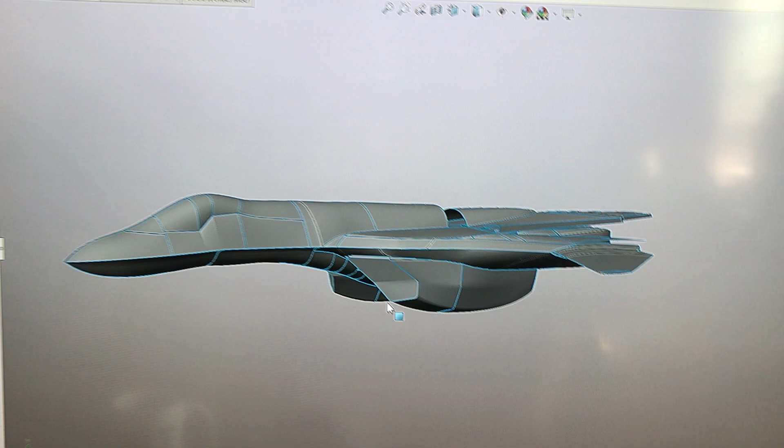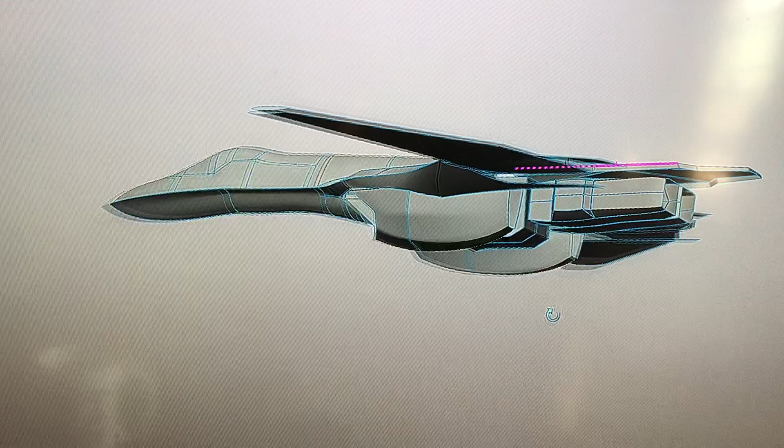Anyway, the last video, which apparently sucked, I just gotten the legs done. I was talking about what I was going to do next, which was moving on the arms, and I've done that. So yeah, quick overview. Oh, and the wings.

Right, so came in. Let me back up some stuff here on our tree. Let's see, let's just go back here, see what I got going on. All right, so I worked on the arm.

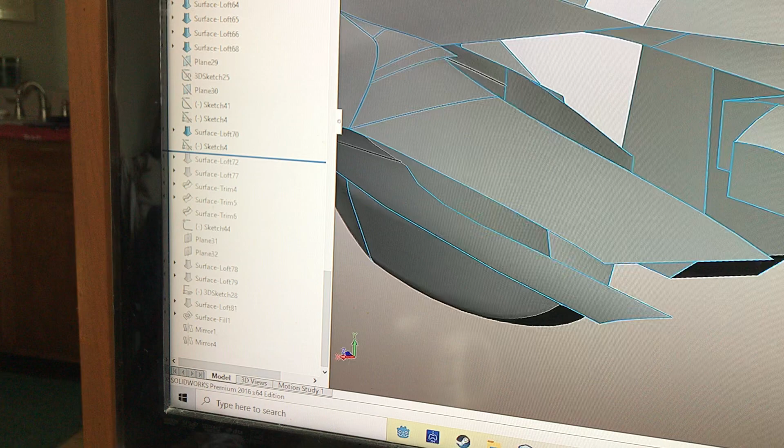Get our sketching view. And what I did was brought in another sketch. I went back in time, rolled back so that all my sketches are at the beginning here, and I have access throughout the project.

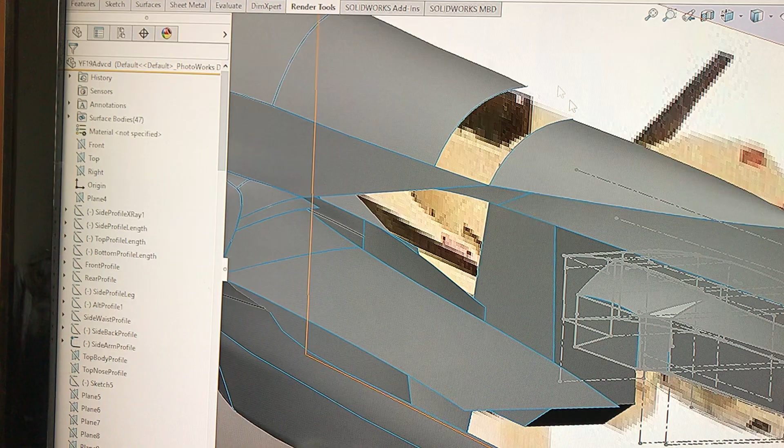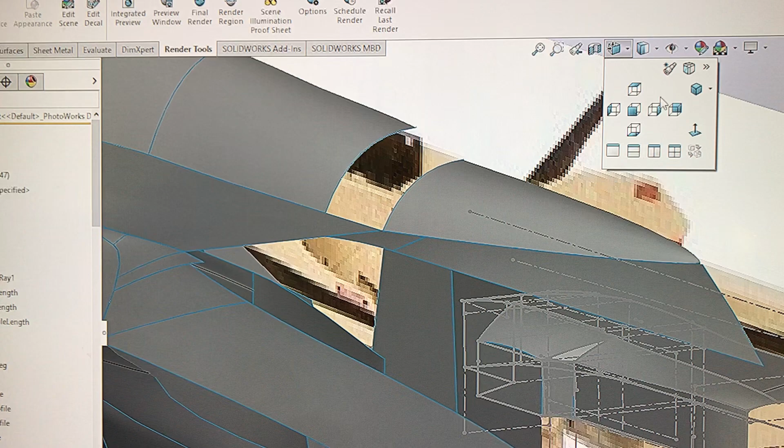I found a not a cutaway - this was a transformation video? Or no, this is from the same user guide that gave me the side image, also had these other images, and they are like the user manual. I don't know how to describe the type of video or imagery, and so there was some instruction - this is part of an arrow showing, oh, you pull the arm down or whatever.

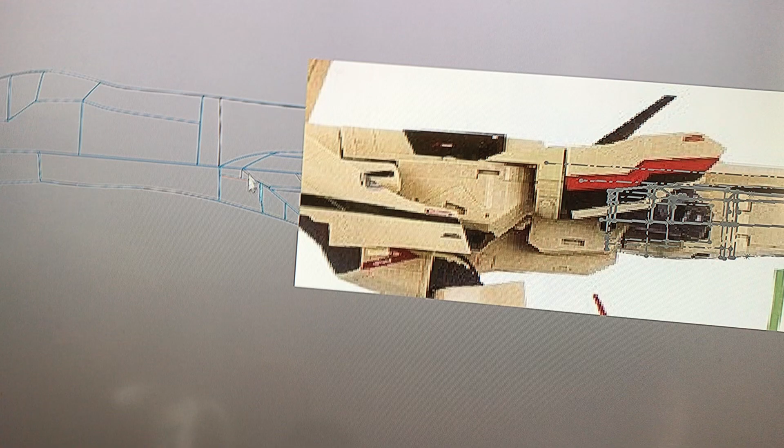So I cut this up, obviously, scaled it again to try and fit my image. As you can see, it doesn't line up, but like I was saying, with the angles and the fisheye, things don't really line up.

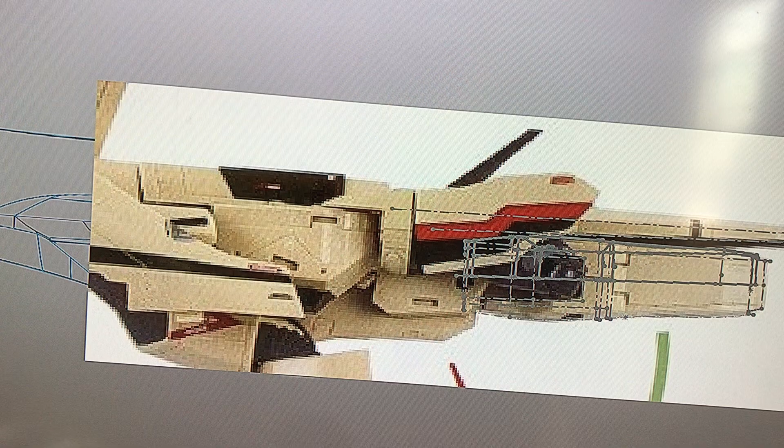So I focused in on trying to get this, just this piece, to line up. Really this, and then the shield. And then I had to make some adjustments on my sketch due to this, so that I'm conforming to what this shield is doing. All right, so with that in mind,

that required me to have to raise this up. This was going at a steeper angle. So this is all up now, and this has more of a bubble on it, but it's more correct.

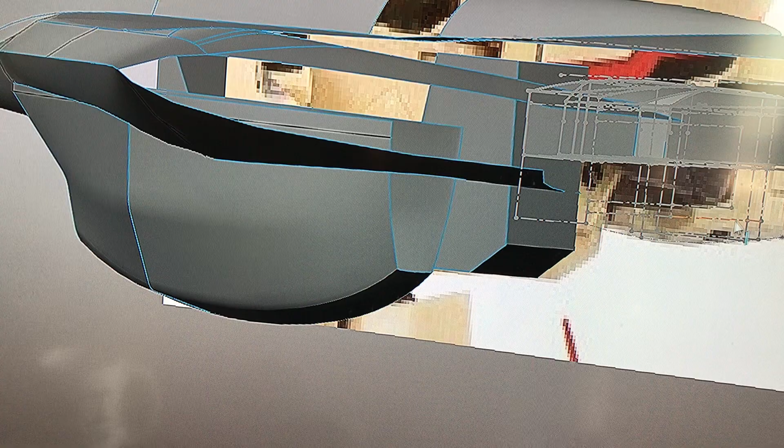And then I'll just go ahead and start rolling back. And then, you know, obviously there's the sketches, but I did my side construction, and then I did a bottom construction. Where's my bottom profile? All right, on the bottom,

and I'm still doing this as I go, right? As I pick something, I'll come back in and add sketches. But on the bottom, I went ahead and added construction lines to go with the arms of the image. Notice it doesn't match it exactly because I'm making it conform to the side image I had.

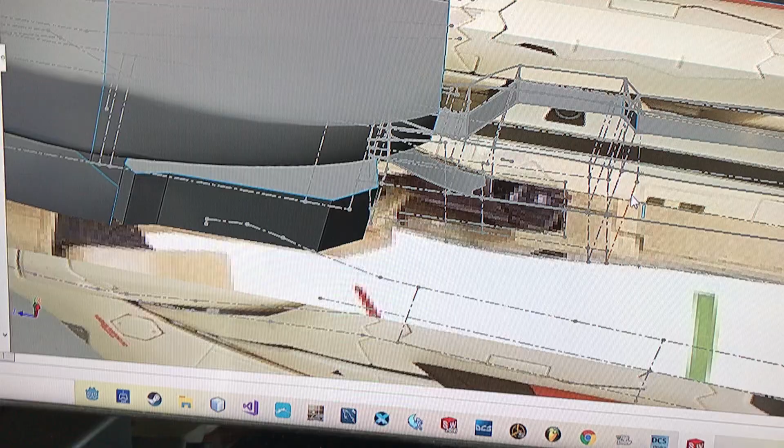So I basically made it and it scooched it back, so it's just really offset but the same size, right? And so there was a bottom, there's a top. I draw some construction lines, extend some lines on the X and Y to basically make a scaffolding - basically make each one of these points a place where I'm going to connect the line. So that's what's going on there.

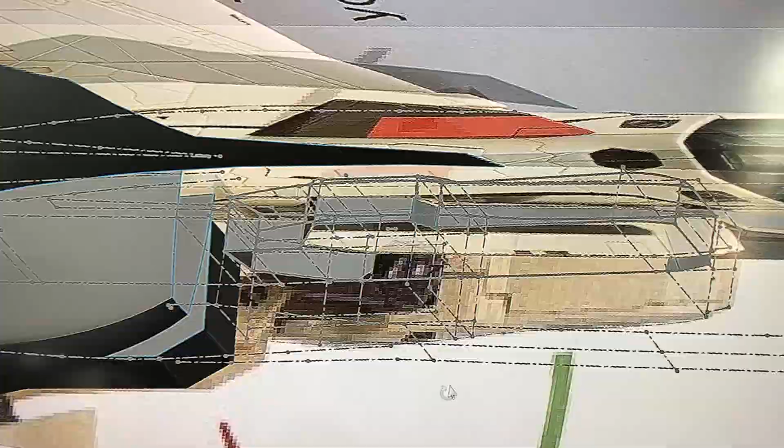And yeah, so we just go through the exercise of lofting and such to get that imagery to come out. Hide this stuff so you can see again.

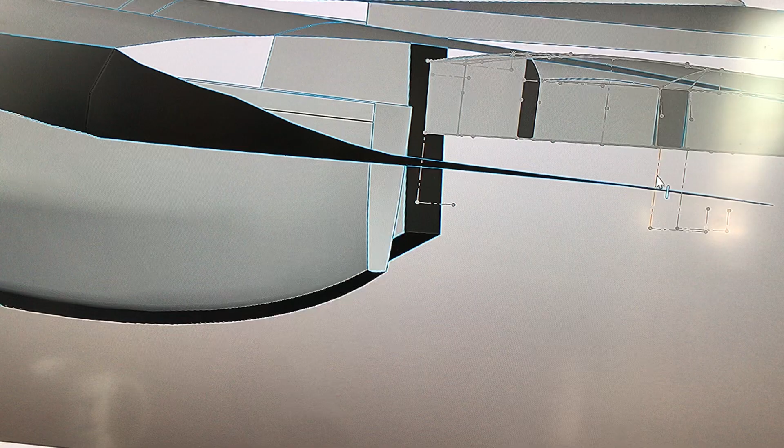Alright, and so I went one side. This angle here is not parallel with anything, or the top - it's got a slight angle to go with the shield, because there's some stuff that I have to build under this shield that allows for a section here to slide under this and become a part of that. So there's that little bit of gap that has to be there. This nice cavity, that should work out.

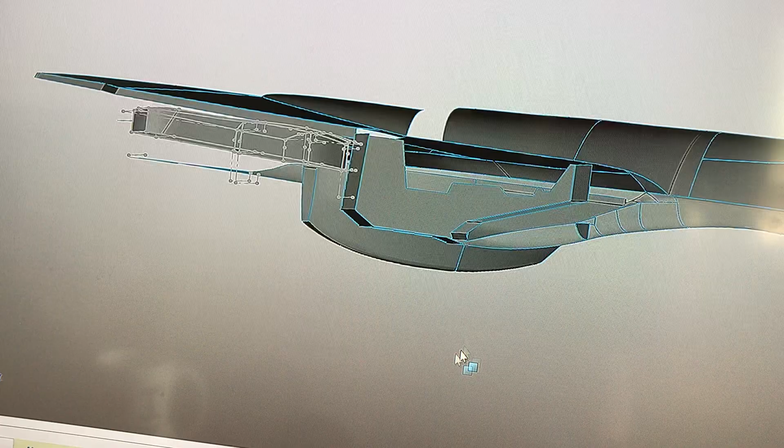Oh, you can see my side cutaway of some stuff. Anyway, so after I got that, basically mirrored the arm. Boom. Because it's just two pieces of one half. And I just mirrored it again, to see what things are looking like.

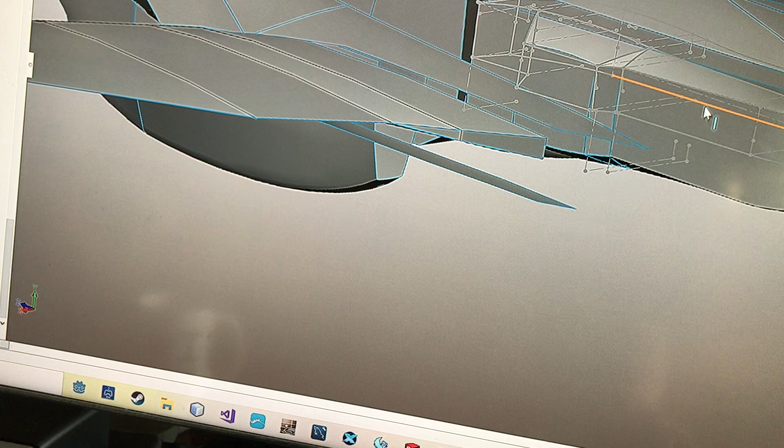Right, and bam, there you have it. Let me add the sketch. And then after that, I realized I have nothing left but the arms and legs to do. And that's where I ran into challenges last time.

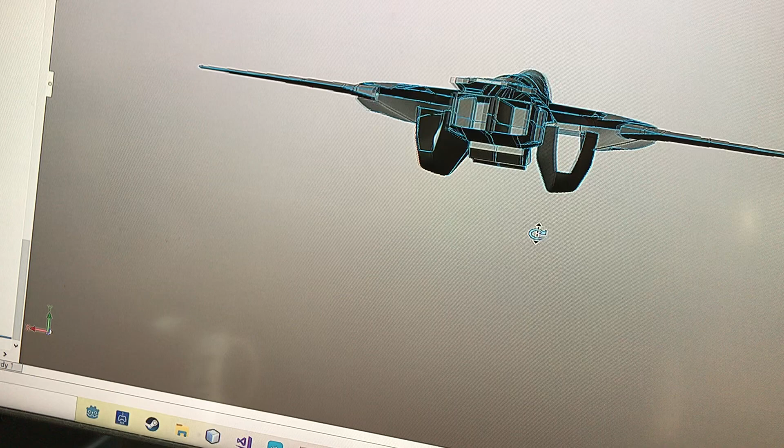You know, the rear part of the leg, the calf leg, I guess. So anyway, when I run into stuff like that, I go ahead and focus on something I can do, so I feel some progress. So I went ahead and worked on the wings, right? Because why not? Simple enough.

Get it in there, starts to look like something - the wings, and then trimming up these edges so that they look like they're supposed to look. And next I have the arm pieces.

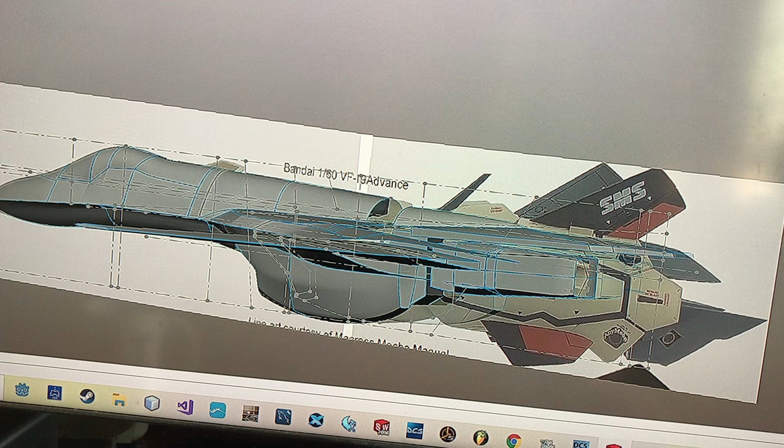I've started sketching them out. So if I go to my side profile, it's basically this, but I brought in another arm. What did I call it? Alt profile is what I'm calling it.

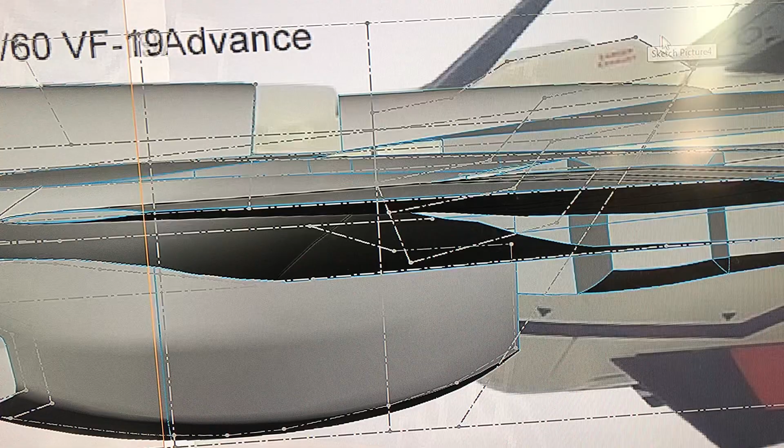Where I've got the sketch of what the arm thing should be - I don't know what to call it, the shoulder, but it recesses down into the body. And then somewhere here's a leg. Where's my side leg profile? And the two together - let me hide the profile lines.

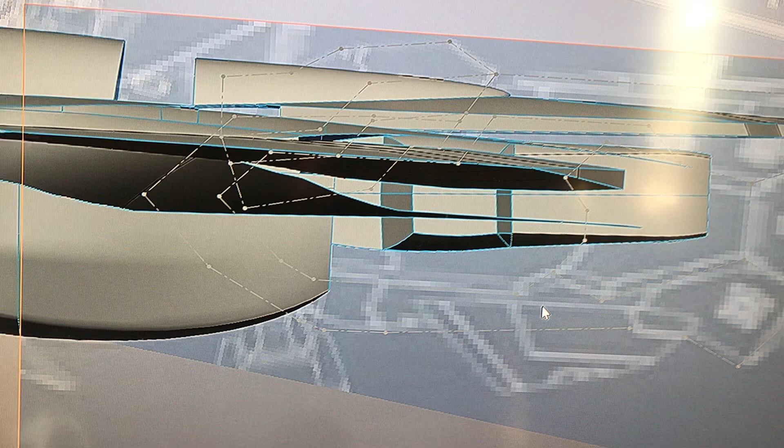So maybe you can kind of see this. We got two images overlapping, a side with some construction stuff that's just giving me the general points, and then the arm one. I have to figure that out.

So I got a side view, and I've got the bottom profile - this is where it sucks. I gotta figure out this crap, but it's so organic, right? Where do I start? So I'm sketching this out, trying to figure out what's the middle line. I noticed there's an angle to this versus being parallel with the center, and this angle needs to translate to the top where the arms are going to be.

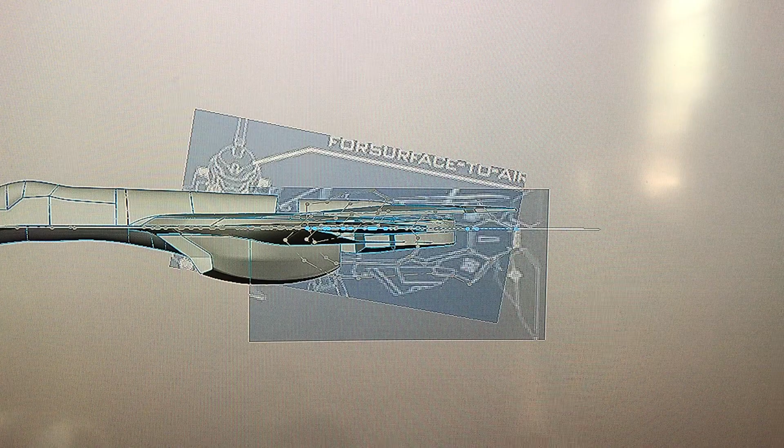Also, top profile lines show - on the top, like this one, doing the same thing for the arm section, right? It's hell. Let me go to the top.

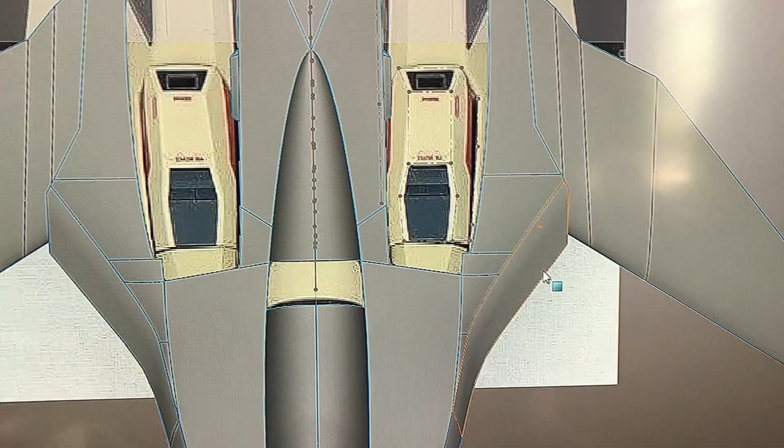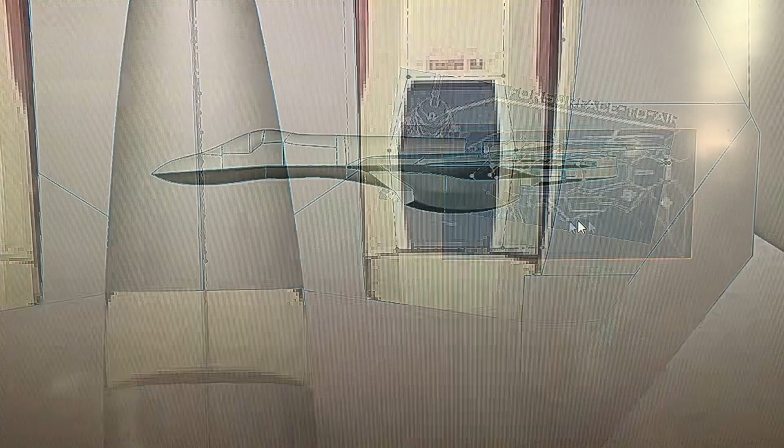It didn't look right. It still doesn't look right - oh, because I still have the bottom on. Anyway, same thing with the top of the wing, getting it, or shoulder or whatever, in place. Not sure how I'm going to do the sides because that recesses down, so I don't really have a side edge. Same thing here, it goes down to the body, so I don't really know what that's looking like. All I really have is this red to go by, and that lines up with these stripes here.

Right, so I've got that. Here's the side - I've already got it kind of aligned with what this should do. I'll just extend some construction points out from this and up from this, and where they meet I will draw lines. We'll see how that looks.

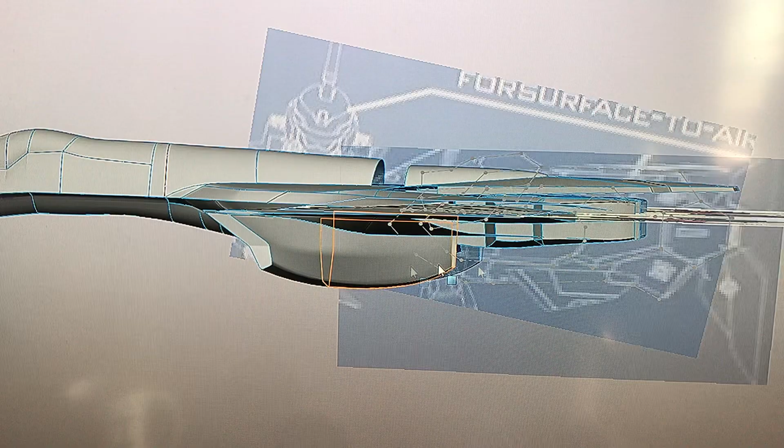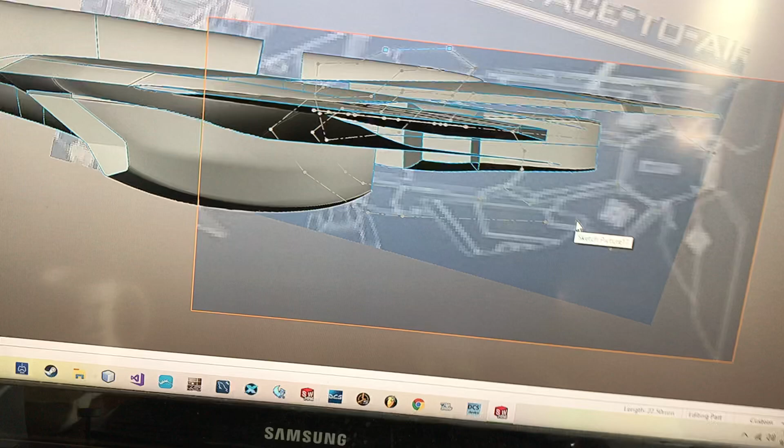I'm definitely going to start with this before I try the leg, although that's probably a bad idea too. I can never get this square. I usually start off with this guy because it ends up being harder than it seems, because it's a weird shape. But at the end, this leg piece with that contour and making it fit right...

It's just been - oh, and printable, because I've been able to make it many times, but good luck shelling it and not having some issues. Good luck doing all kinds of things. Split it just right so you can 3D print it, because things want to fall apart when the geometry gets wonky once you start cutting it up a certain way. Anyway, that's where we are.

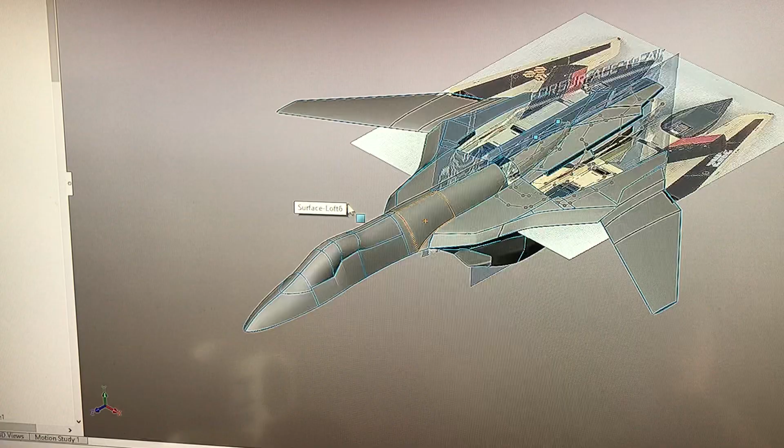I'll do a quick render, because that's always kind of cool, sorta - not really. I got, what do I have on? I think it's called Street Lights or something. Final render, to make it look cool. It highlights the model, kind of colors it green with red and green highlights here and there.

It's neat. Hey, look, you can see me in the TV. And you can see I'm doing this with my damn cell phone, and hopefully I'm loud enough.

But anyway, I don't know, I thought this would be interesting. I could never find videos of people doing this shit. I'm gonna do it - maybe somebody cares. Hopefully some kid somewhere doesn't give up.

So we get pulled into this world where creativity is sucked away and replaced with, I don't know, corporate nonsense. Hell, people aren't even inspired - this is cartoons from the 80s and 90s inspiring me in the 2020s. What are the kids today gonna be doing? I don't know, rioting.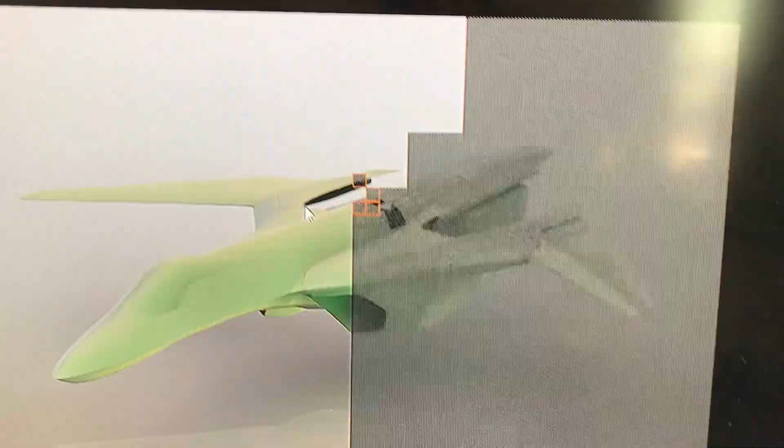As you can see, I only have 4 cores on my cheesy computer. I hate that this does all the rendering with the CPU, because I have a very nice GPU. And I don't have the program - the plugin, well it's not a plugin, it's a module. There's a visualizer for this that will use the GPU to do this rendering, and I don't have it.

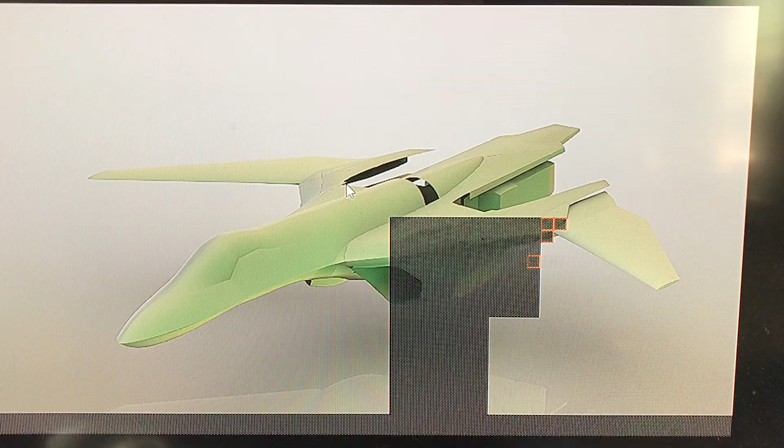Spoiler alert, this isn't the most official software. In fact, I didn't even say that - it's completely official, I paid for everything. I think that's the price you pay. It's buggy as hell because, hey, you got it, you had to get it, and so you got it, and you get what you can get.

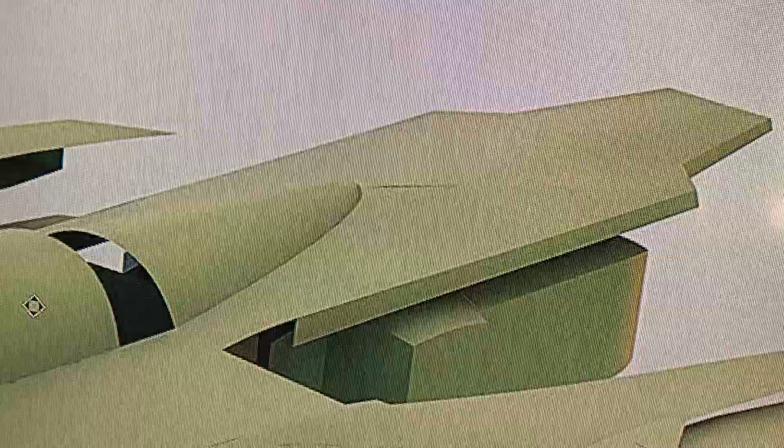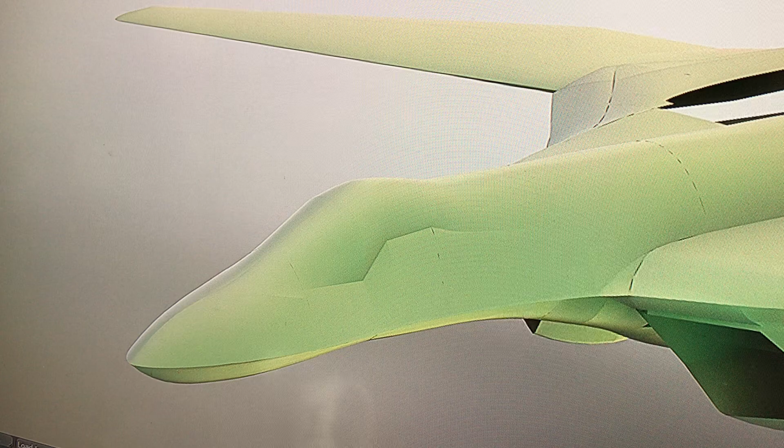So far, these are the best - you guys haven't seen the other things, but this is the best version of this I've done so far in terms of minimal lines, not a lot of weird stuff happening, and not having to tweak one little thing for a week because I couldn't figure out how to make some angle happen. So yeah, I guess after trying for years and years, there's some intuitiveness I've learned where I'm just doing the right thing right away now. It's crazy, it's like anything, I guess.

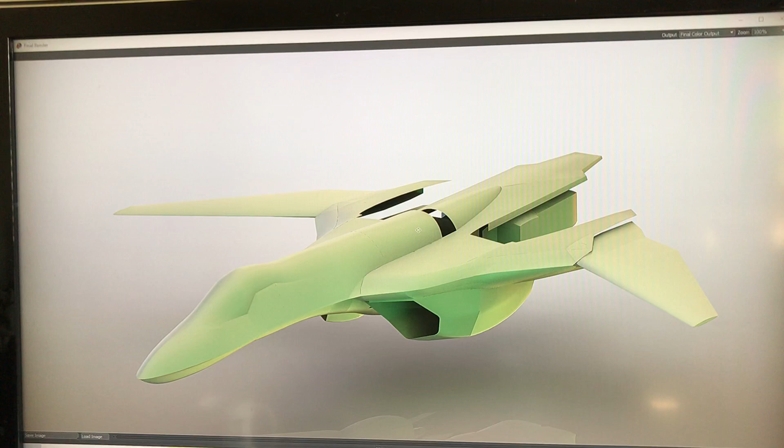Like you're practicing piano for a while, then you suck at it, and you put it down, you come back, and then bam, you're like, whoa, when did I get better? It's that kind of a thing. You don't see it while it's happening, but when you take that moment away... anyway, there it is. Till next time, if there's a next time.